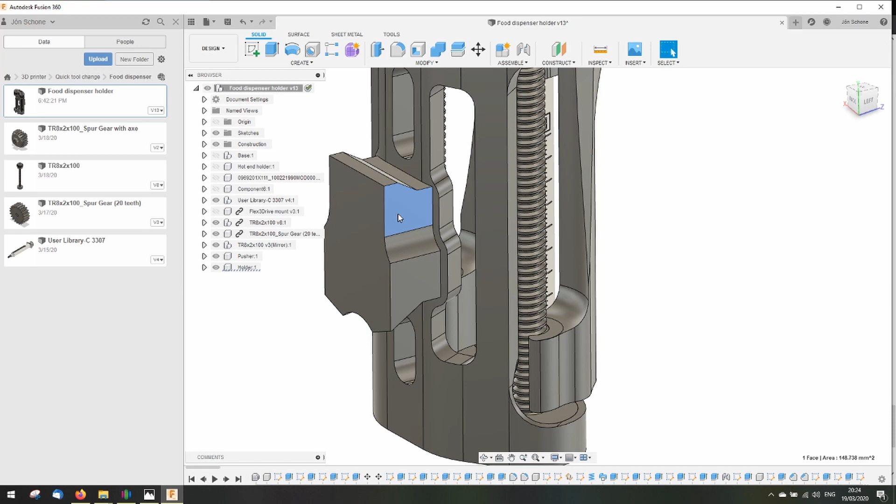So I started designing in Fusion. As you can see, it fits the tool holder. If I zoom out a bit, then this is the whole thing. And yeah, you can see it's not so much targeted towards hygiene as the other printer. This is purely functional, and it has to look cool.

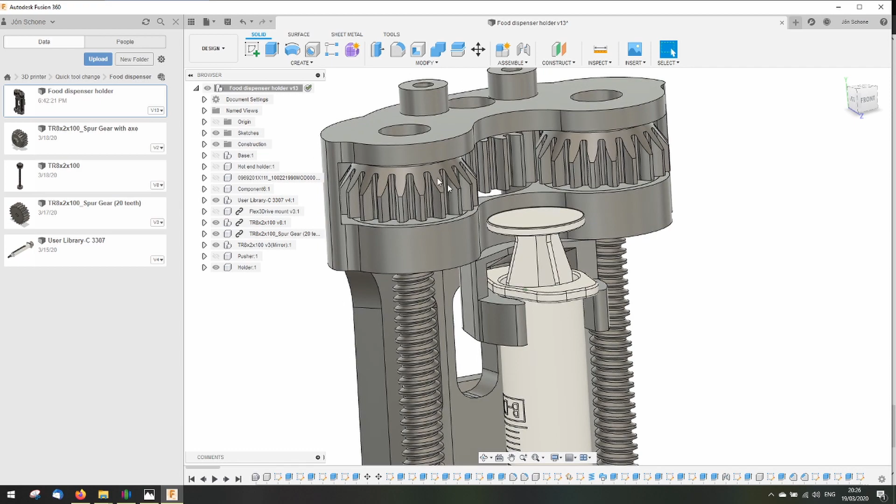Here on top it should fit the detachable direct drive that I've made, not in my previous video but in the video before that. It's the Flex3Drive that I've made detachable with the use of this hexagon bit. These gears are made out of nylon. I've made a tapered edge on here that makes it a lot easier to print. If you use a tapered edge like this and you place that face down, facing towards the bed, and it curls up a bit, or you have elephant's feet, it doesn't matter that much for the teeth itself. I'm very happy with the result.

It has two of these threaded rods. This is a 2mm threaded rod, and I can just pretend like I have intentionally bought this 2mm threaded rod because of my calculations, so it fits well with this design and the step value of that E-stepper motor. But truth is that I bought this threaded rod a while ago while I was working on the dual Z-axis, and some of you can see this one coming.

The standard Creality printers have an 8mm pitch, and this has a 2mm pitch. The other rod will go up four times faster than on this side. Yep, I smacked myself in the face a few times and bought the 8mm pitch. Don't make that mistake.

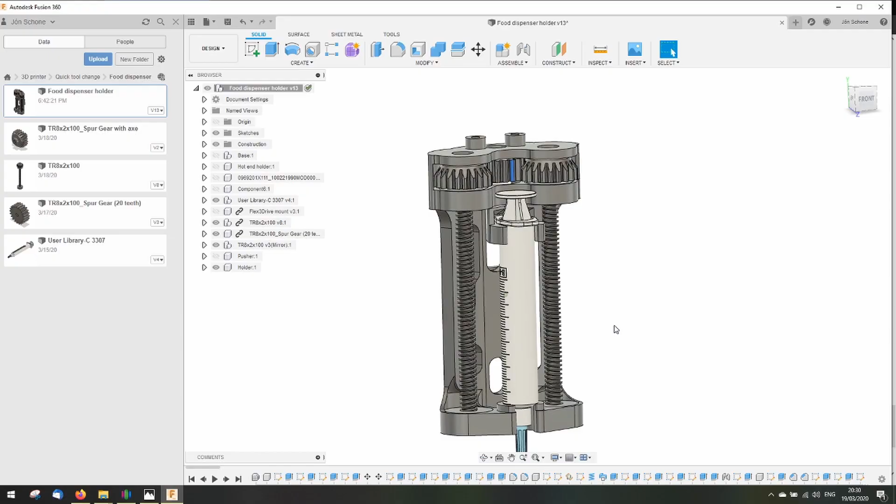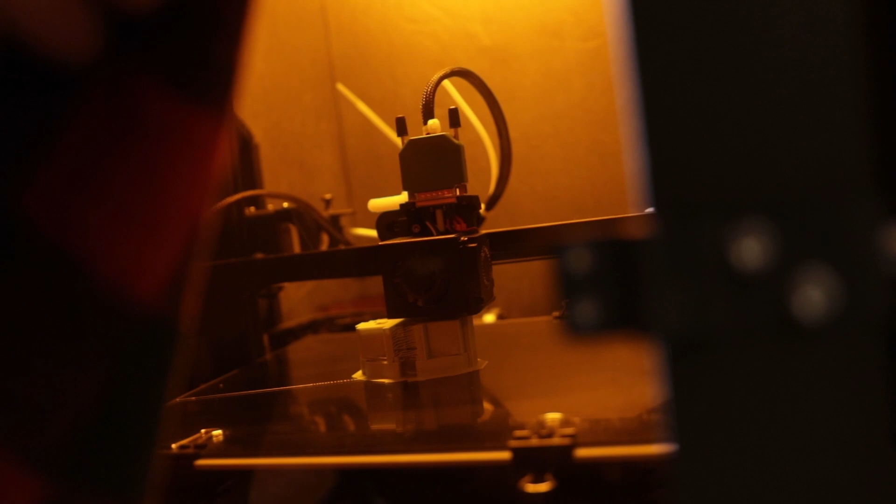This part here is this, and you're not going to believe me if I say that this is my first try, and for good reason. Because this is not my first try. This is printed out of ABS, and it turned out great. If you are wondering what my secret is about printing these large parts with ABS, just this jacket over here is my secret. Nice. So I can just place a syringe here, and it clicks into place.

And the last thing, there must be something to push this down, of course. This pusher clamps on the top of this syringe, and on the other side it will snap onto this thread. Just snaps into place. In this way I don't have to rotate it all the way back up. I can just snap it onto there and start printing food. Because if you're hungry, you just want to start printing food.

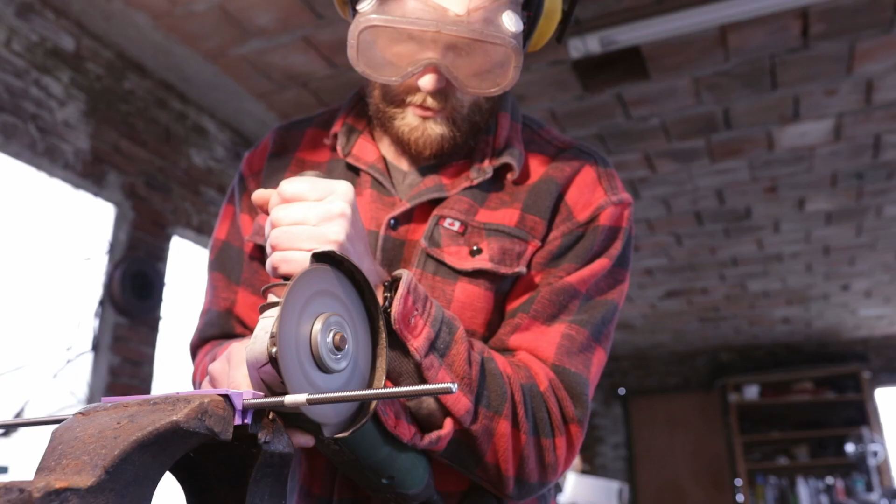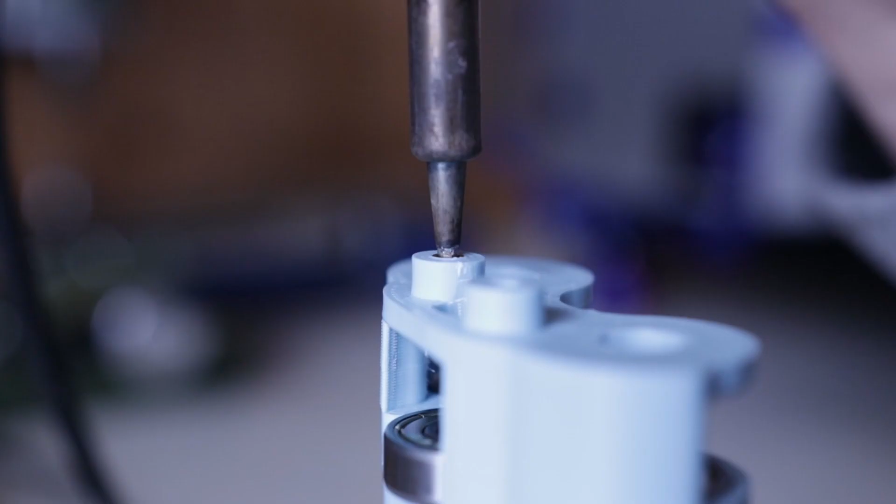And now I have to find a way to shorten this one, because this is hardened steel. And okay, I've got all the parts here, and I've already added the inserts into this part. Now it's time to mount everything together.

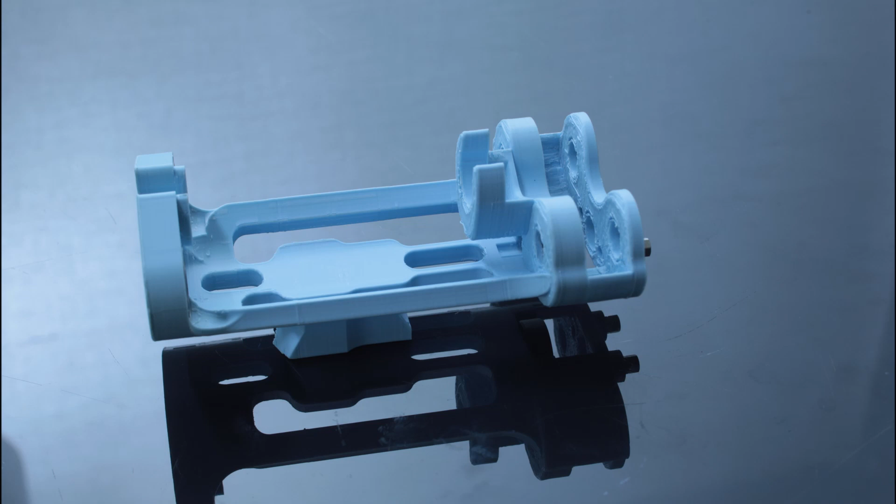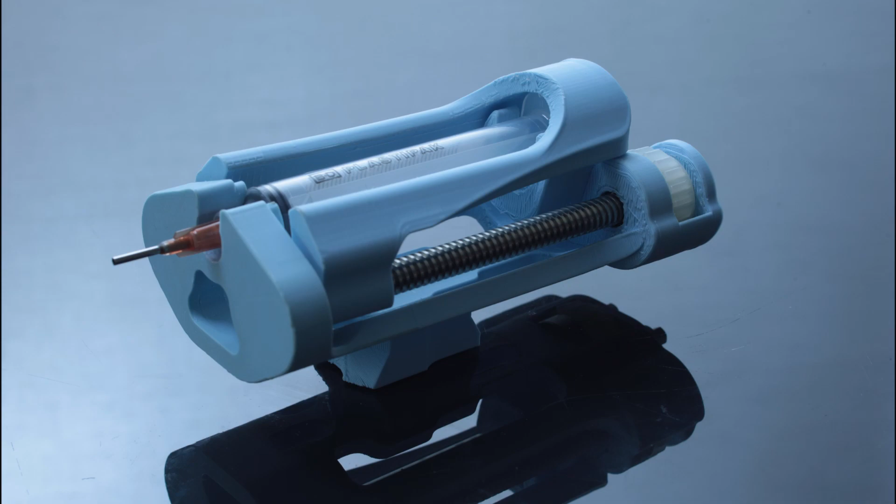What the hell was I thinking? It just puts itself together and does work. I can just clamp this on here. Yeah. Looks a bit like a futuristic vaccine gun.

Oh shit! Stay with me, man. Hey! Hey, stay here. Come on, don't die on me, man. Trust me on this. It may hurt, but

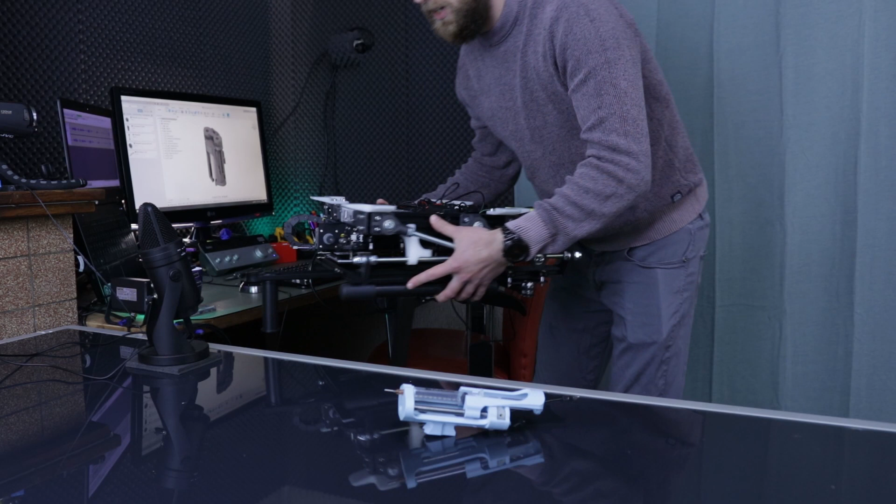I have found this old piano stand so I can reach the electronics. I just added this Duet board. It's huge, it just fits in here. I just downloaded the RepRap firmware. With their firmware configuration tool, I managed to flash the firmware and it seems to be working. Except for the Z-axis, but that's what I'm going to work on right now.

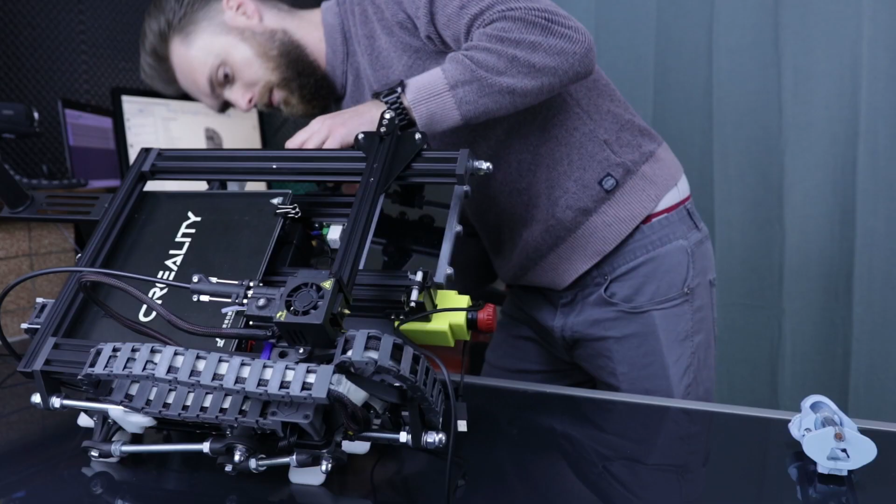Okay, one thing I already have found out. In order for this to work, you must disable that cold extrusion prevention. It was at 170 degrees, but I don't want to turn on this. So I've set that value to 0, so I can just extrude. I have to raise that homing switch.

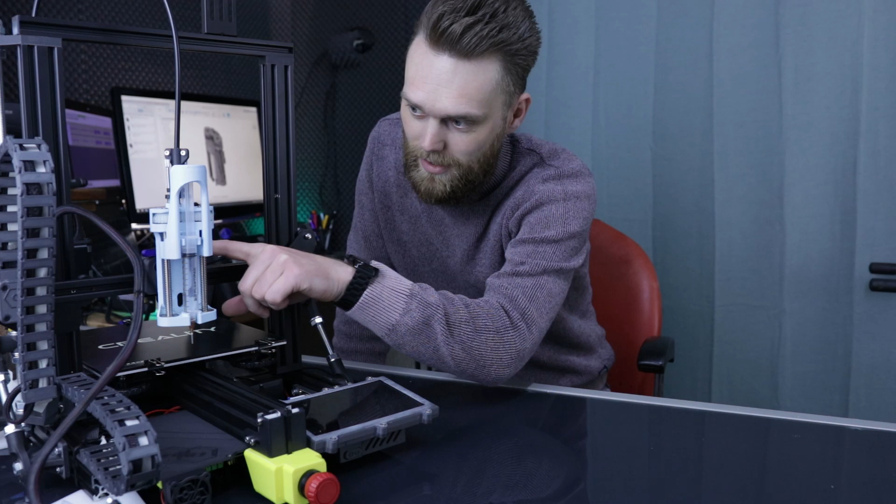Some of you already know that I've made a tool changer with Z-homing in it. This is the reason why. Well, one of the reasons. For now I will just raise that homing switch. Let's see if it extrudes. I have already tested. The motor is connected properly this time, so I will not blow up the stepper. To be sure, I will put this in the middle, because I don't know in which direction it will extrude. Here we go.

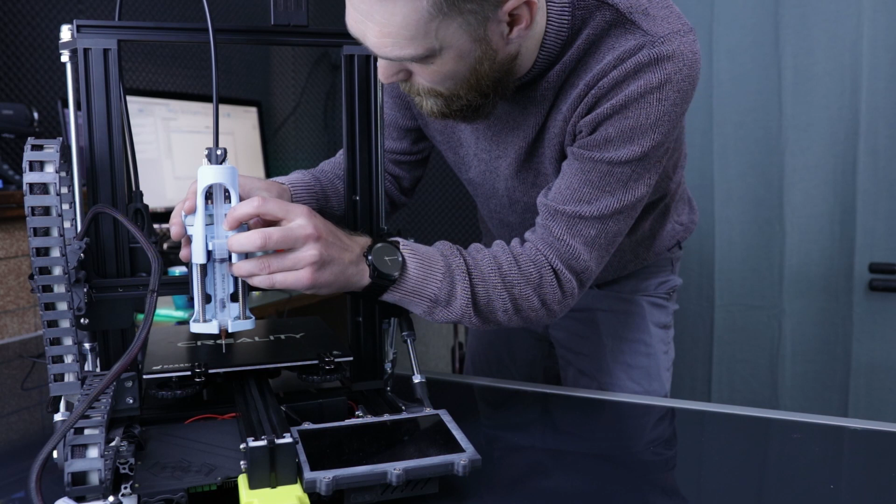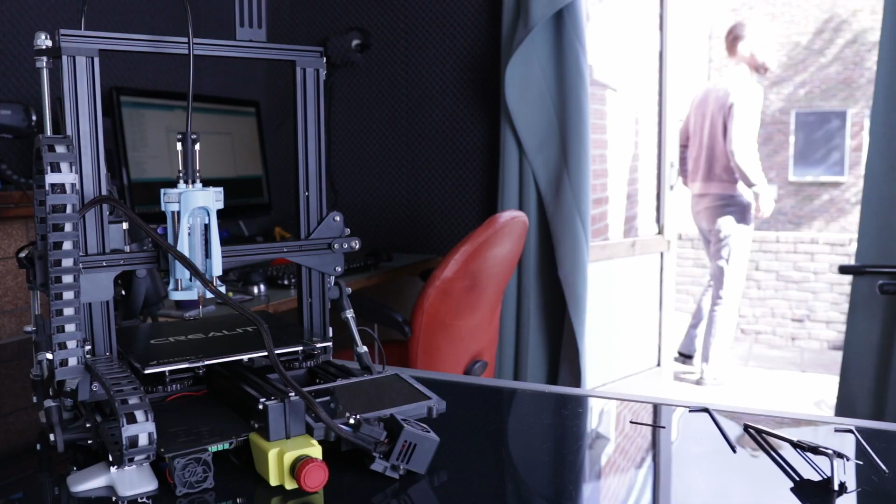This can be a bit of a problem. So I'm going to make this run a bit smoother. See if I can, wait one moment. And I'm going to fix that firmware so that the Z-axis steps are correct, because it's running super slow right now. Yeah.

So the sun has started to shine, so I opened up everything. Have to let out the heat.

Yeah. I have managed to fix that Z-axis. I wasn't the only one with this problem. If you use the RepRap software, then chances are that X and Y work properly, but the Z-axis will go terribly slow. The thing that solved it for me is setting the EEPROM mode to 0. So all axes work, including the Z. Nothing is burning out. The center gear wasn't running smooth, so I've made a bit more clearance and added a bit of lube. Let's just try to fill this thing up with food and let's see which E-step is the best for this. Still, it's cold here.

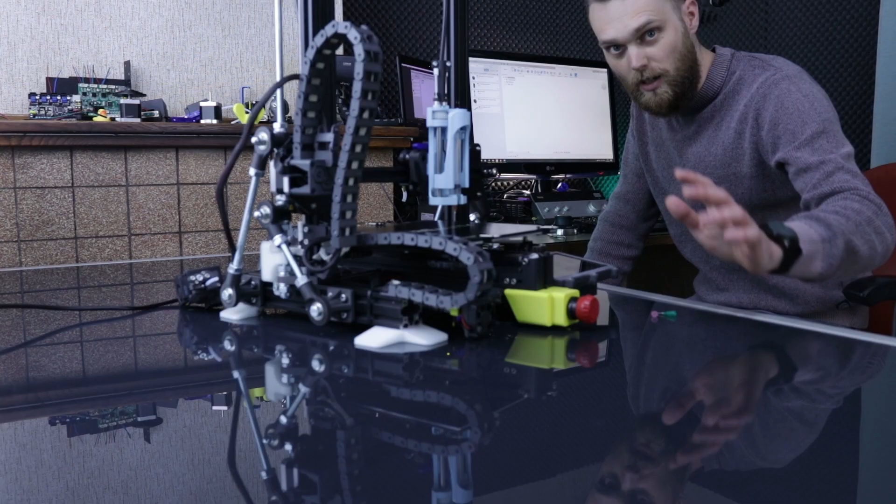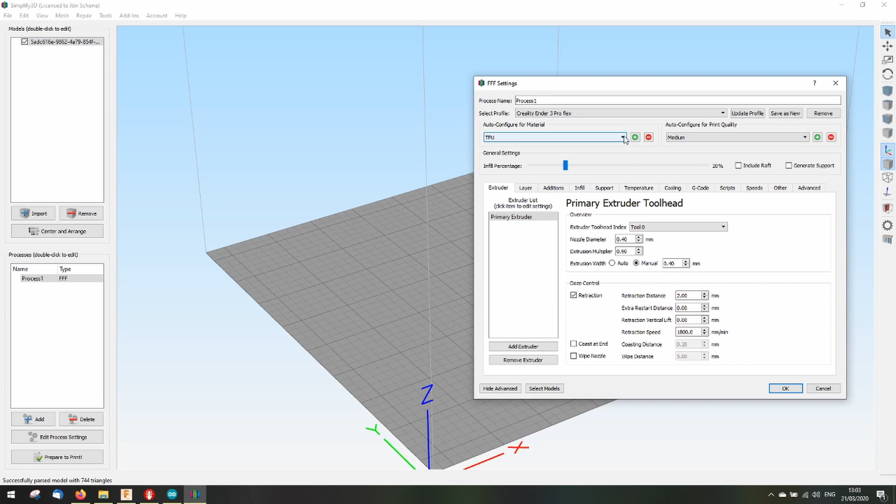Okay, before I'm going to print anything, I have to design something to print, and I have to make a profile which works with this tool. I'm going to make a pretty difficult design. An extrude of 0.6, just to try. Send this to Simplify3D. Now I have to make a new material, and I'm going to call this pate. Temperature of the heated bed is 0, and of the primary extruder also 0. Good printing.

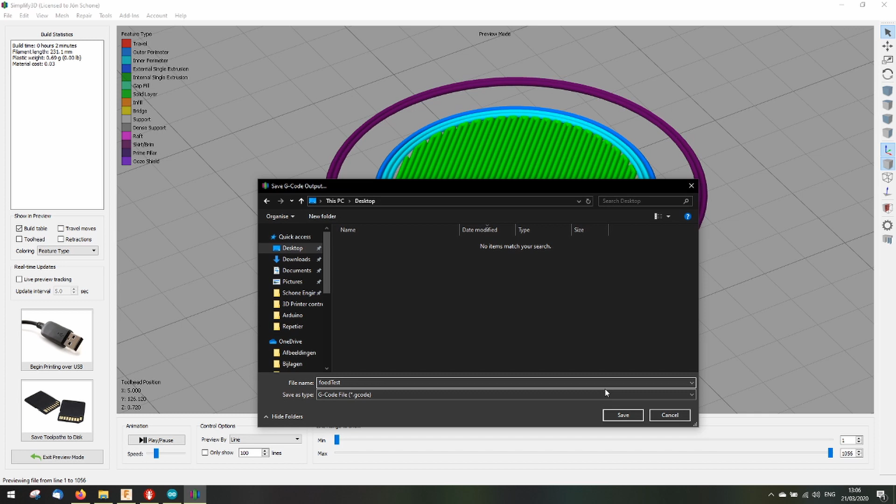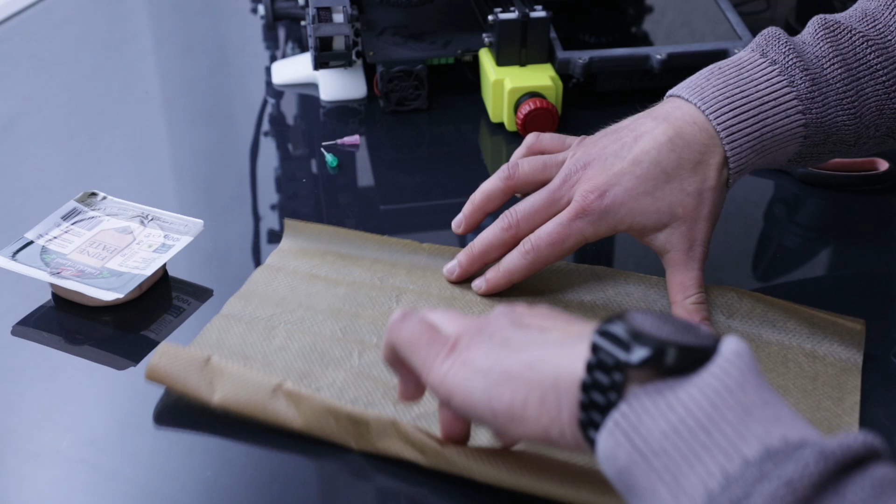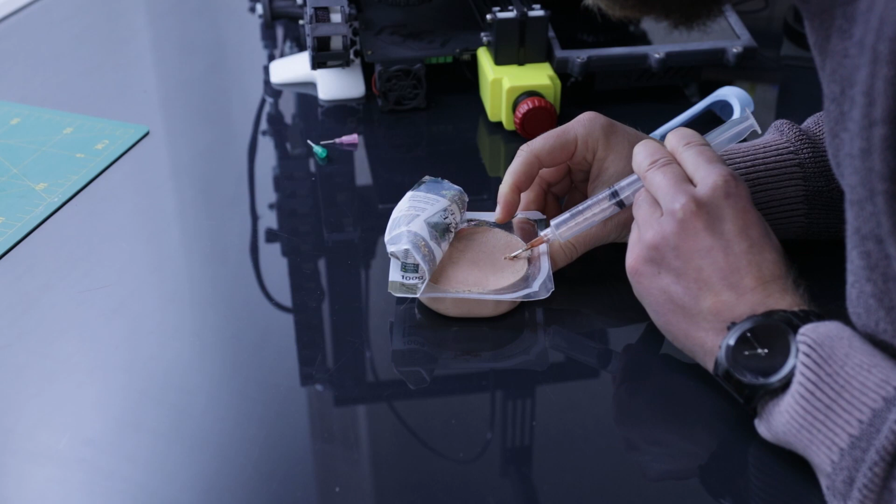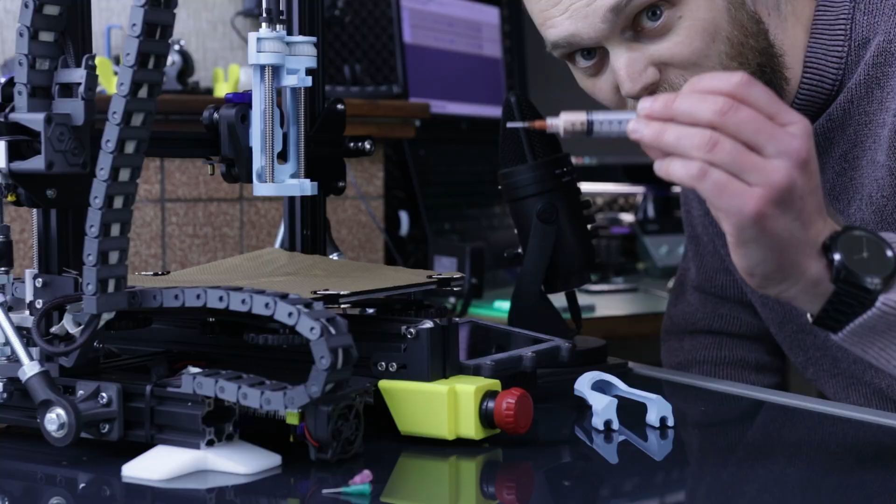This sets the new E-step value of the nozzle, and I'm just guessing 1900. Save. And I have installed a Repetier server so I can upload the G-code. Let's make some build surface first. This amount is just for testing purposes, and I am a bit skeptical because it is pretty hard to push this out. One important thing is that this collar here must be clean, otherwise you put food in there.

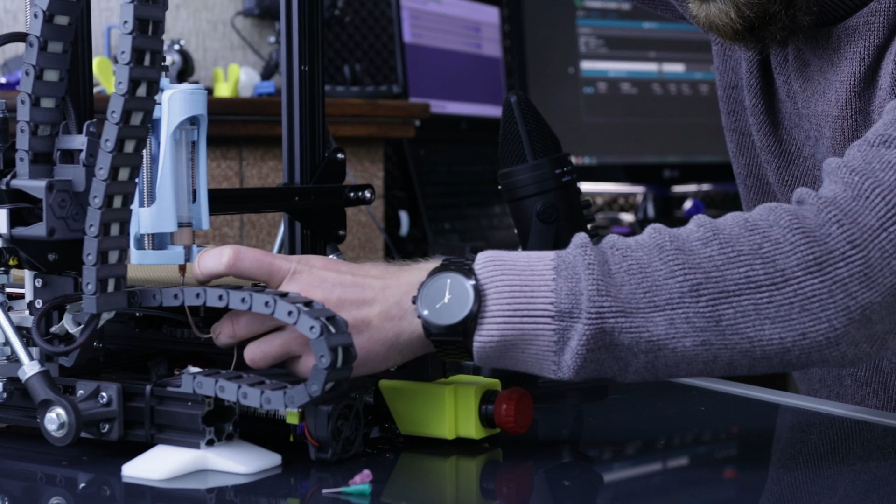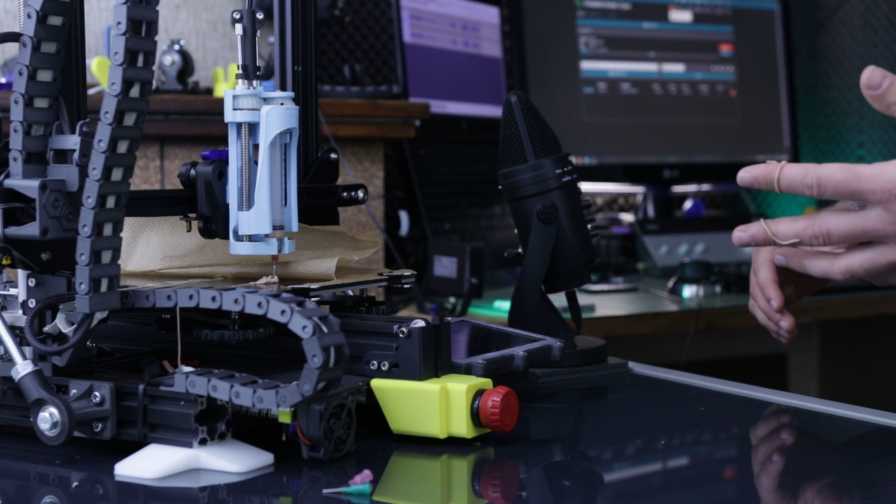Turn on the printer. Let's start the G-code. Print. Oh shit. Oh fuck. Okay. Stop. Yeah. I think I have got a little bit of over extrusion.

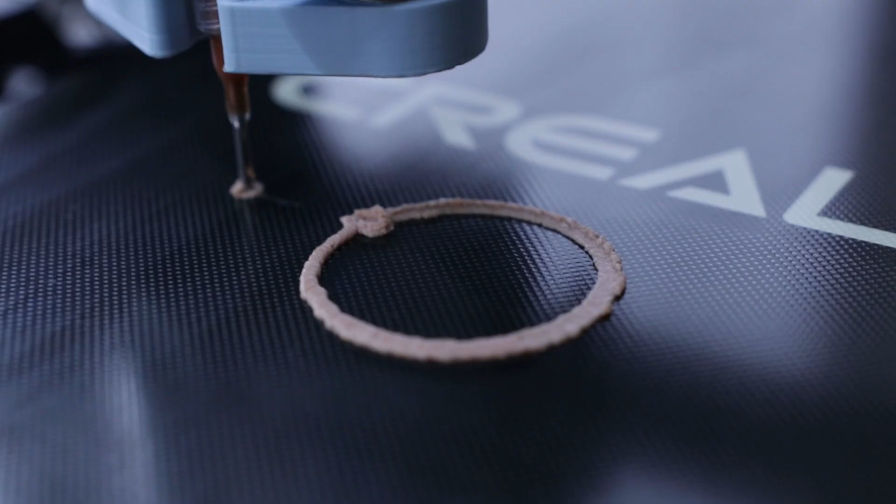Okay, I've cleaned up this glass plate with dishwasher soap. I have raised the printing speed and I have decreased the E-step value by a lot. Let's try a second time. And I have removed that purging step at the beginning, so it doesn't purge all that material on my printer. A bit of over extrusion still, but this looks very promising. The E-step value is now half as much, so print.

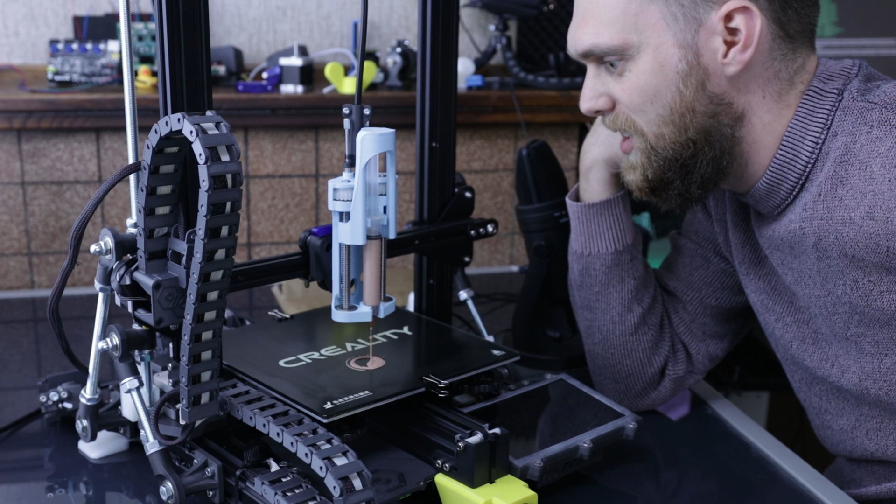It takes a bit too much force for this axis to push all this material through that nozzle. I'm thinking, do I have to change that gear ratio? Or, okay. I think I have an awesome idea. Well, that idea sucks. I just started modeling, and after I had modeled everything and printed it out of nylon, I realized this is so stupid. If you have a planetary gear system on this side, you will reduce the gear on the side of the motor. But the problem isn't at the motor but within the shaft, so the same amount of force is still applied on that shaft. Oh.